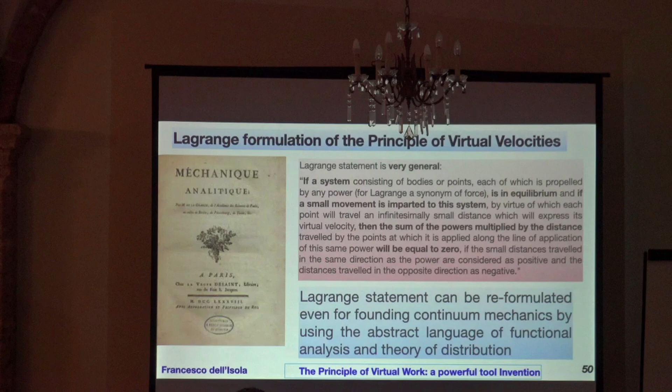I want to specify a little bit better the homogenization as conceived by Gabriel Piola, because here the audience is made also by experts in mechanics, and I want to underline that there are some differences due to ignorance. The process of obtaining macro theories in a rigorous way, starting from micro theories, is complicated. And so in order to proceed, we use this heuristic procedure. We have a beautiful way of telling in Latin, excusatio non petita, accusatio manifesta. I was excusing myself at the beginning, so I was accusing myself.

When I said that we do not know really, we can simply conjecture which are the continuum macro models which are good for a certain micro system. And to tell you that we are not so stupid, I showed you Archimedes' text where he is inviting us to conjecture somehow the result and then to propose to mathematicians the proof. Of course, Archimedes was capable of doing all the job by himself, and this is rather rare in history of science. Okay, so how do we formulate the conjectures?

And again, answering to Vladimir, the novelty you have for external interactions. Look at the first addend. There is no pointer. Look at the first addend. You have FV, force per unit volume, here. What is a force? It is the dual in the power functional of the velocity. Then you have integral on the boundary of B of F dot V. So this is a force.

It is a force per unit, no. You have to switch on, on the side.

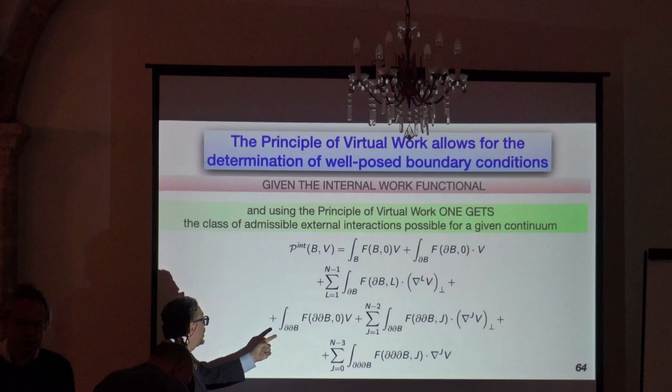Okay, so you have a force per unit surface. Then, which is rather new, you get forces per unit line and forces concentrated on wedges. So this is what we are familiar with. But you have also the dual in work functional of the transverse derivatives of the virtual velocity on the surface, on the edges, and on the wedges. Do they have to be compatible somehow?

What does compatible mean? All of these F's can be represented in terms of T lambdas in a generalized Cauchy theorem. So these F's must be balanced by an expression coming from the internal power given by T lambdas. Of course, if you consider rigid motion V, you get for the translation balance of forces, and for the rotation balance of moment of forces. But with deformative V's, you get other necessary conditions to equilibrium which are lost if you postulate only balance of force and balance of moment of forces.

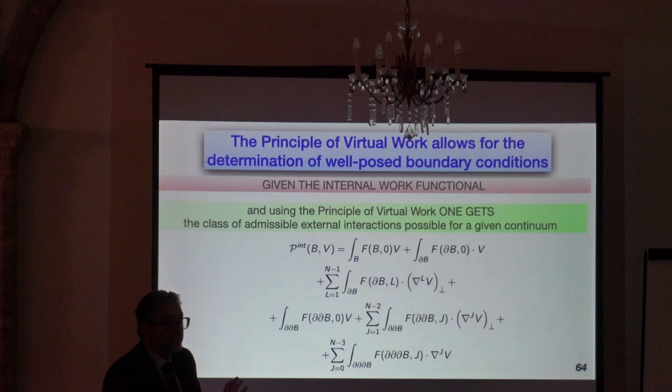And again, this is clearly written by Piola in his book. What is astonishing is that Truesdell calls theorem of Piola the theorem which proves that in equilibrium you have a necessary condition of balance of forces and moment of forces, but he has not understood that it is only necessary. It is not sufficient for equilibrium. So clearly he was reading what he wanted to read, not what was written. So we can easily deduce the class of natural and essential boundary conditions leading to well-posed problems, which for mathematicians is essential. Boundary conditions cannot be induced experimentally.

Now, let's go to a slide which I added for answering a question. The problem of synthesis is not new. The mathematical methods to be used must be similar to those already used for designing analog circuits. I am old enough, maybe few people here have my age or are older. We had to study the circuits which were analog to specific partial differential equations.

Why? Because in absence of digital computers, in order to calculate solutions of partial differential equations, you needed to build an electric circuit governed by the same equations, and then the solution was obtained reading the voltage somewhere in your circuit. So in the theory of analog circuits, you have the equations, and you must find the physical system governed by these equations.

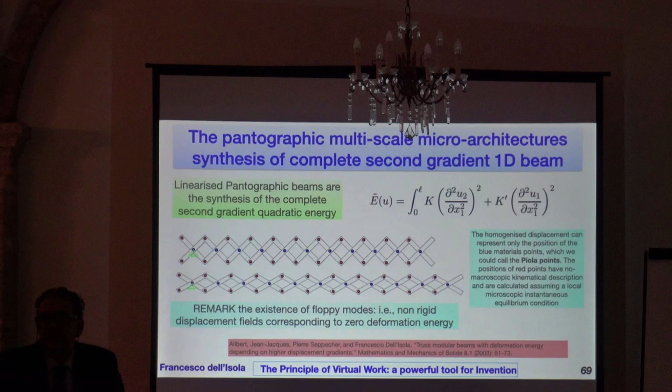Truesdell decided that second gradient continua cannot exist because the second derivative is negligible in a Taylor expansion. So, in his opinion, the second gradient is always negligible with respect to the first gradient. Okay, this is a good argument, of course, but look, this microstructure has zero energy for elongations. Nothing is negligible compared with zero. So one should teach Truesdell that a Taylor expansion has a dominant first term if the first term is non-vanishing. If the first derivative is zero, the first term is vanishing. And this was the crucial point in the argument we have used in this paper.

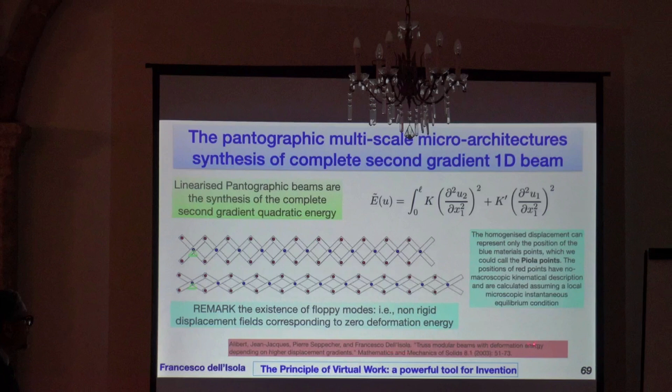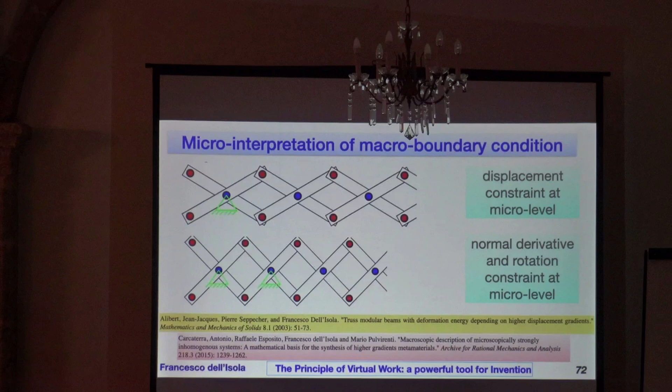Okay, now I must run. Of course, micro-interpretation can give you an idea of how you can realize the boundary conditions which you have calculated at macro level. For instance, this pantographic beam, if you want to block elongation, needs a double pivot there, and the double pivot is exerting a vincular reaction given by these micro forces. Now remark that this pair of forces exerts non-vanishing power on a virtual displacement which is changing the length of the cell, okay?

In the limit, this animal is expending power on the normal derivative, so on the derivative along this axis of the beam. So you have what is called a reactive double force. That is not a couple. It expends work on elongations.

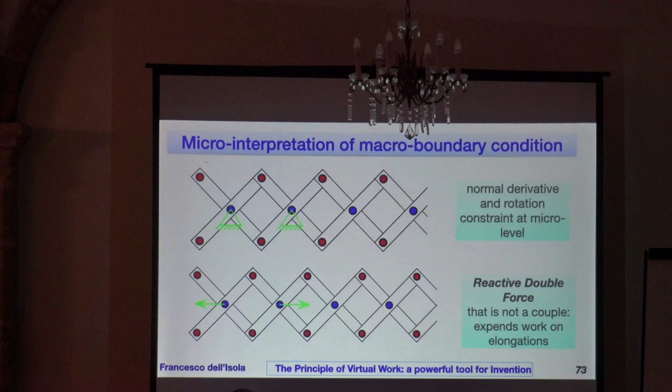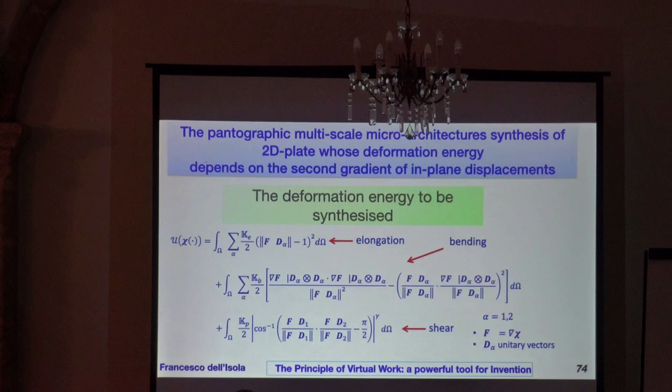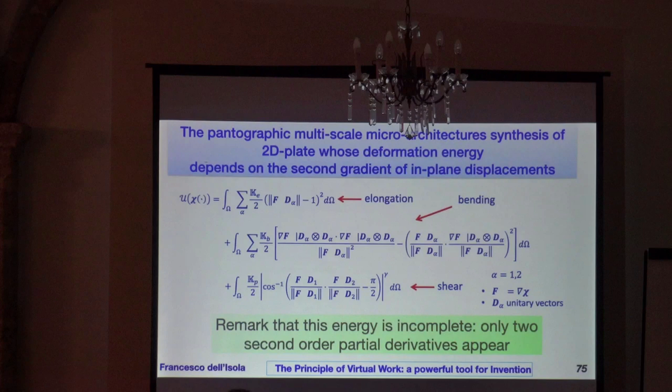Okay, then we wanted to have a 2D plate whose deformation energy depends on the second gradient of in-plane displacement. The deformation energy which we conjectured was that, and this is an incomplete second gradient energy. Some second order derivatives are not appearing in the energy. But, you know, one is moving one step after the other, okay? And the synthesis which we obtained is this structure.

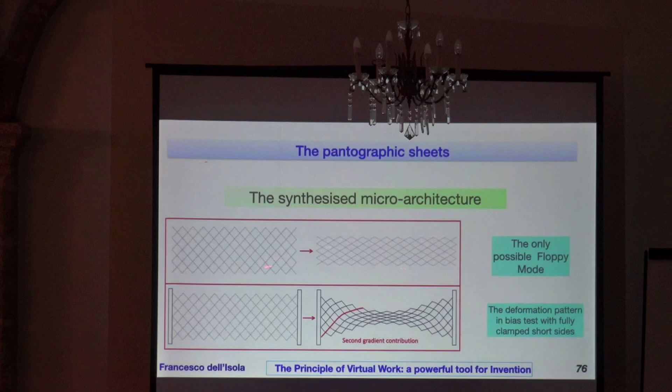Here you have beams, and in every node you have a perfect pivot, and you can understand why you get a second gradient contribution. This beam is bent, and therefore the second derivative of displacement of this beam gives you a contribution to the energy. There is a floppy mode without boundary constraints, which is this one. This is a mode of zero energy. Okay?

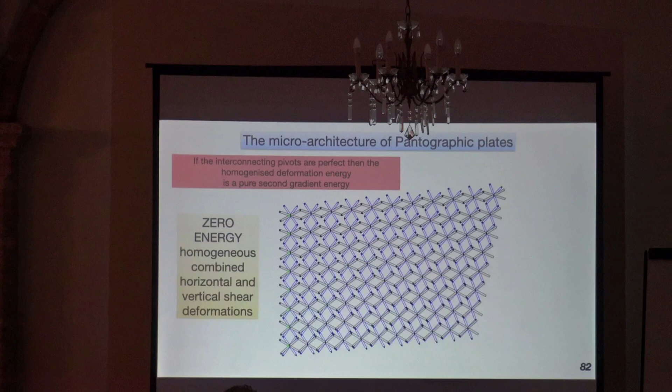Okay, then we wanted a more complicated energy with more second order derivatives, and we assembled horizontal pantographs with vertical pantographs, and all these are zero energy deformations, and therefore what we get is a pure second gradient energy without first terms in the Taylor expansion, as I told you. This is the microstructure made of springs. We also made a study of dynamic problems for that.

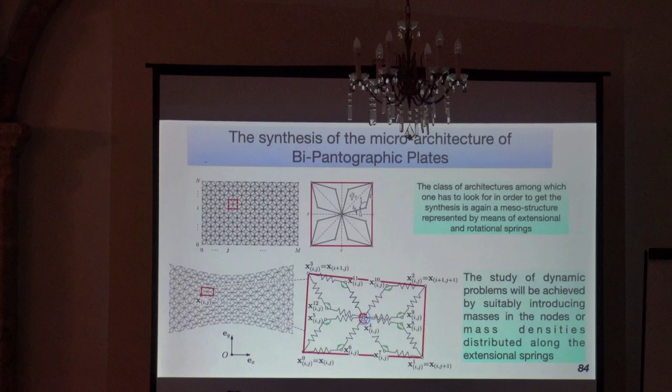And we found another mathematical problem. As the energies are incomplete, available theorems of existence and uniqueness are not applicable. Thank God, Nikolsky, a Russian mathematician of the 50s, wrote many books about anisotropic Sobolev spaces, which are spaces in which the norm has only some derivatives of higher order, and therefore applying his theorems,

of course boundary conditions must block floppy modes to get well-posedness results. So not only rigid motions, but also every floppy mode must be blocked by boundary conditions. We got a theorem which we published with Victor Eremeyev, Claude Boutin, and David Steigmann in the Journal of Elasticity.

Okay, now I will show you that everything is not a dream. We could print with 3D printers these microstructures. An important warning is needed. This has to be understood.

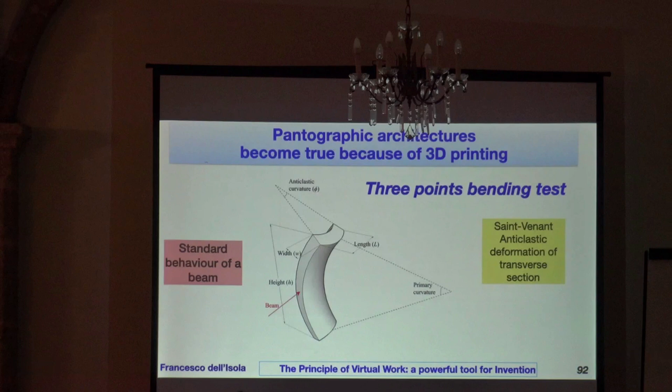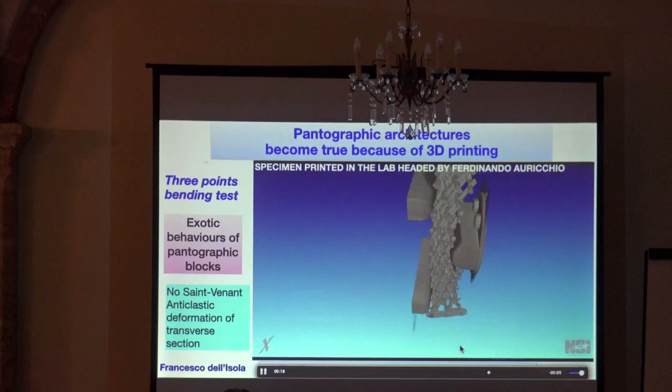Now, thanks God, I have a friend who printed this specimen, and another friend, François Hild at École Normale Supérieure Paris-Saclay. By the way, I must acknowledge my affiliation at l'École Normale Supérieure de Paris-Saclay for 3 years, starting from this one. This is not a numerical simulation, this is an experiment. In Paris, they have a tomograph. You place your specimen inside, and you can see inside it everything, producing these pictures.

And this pantographic structure has non-anticlastic deformation of the transverse section. So this is an extremely exotic behavior.

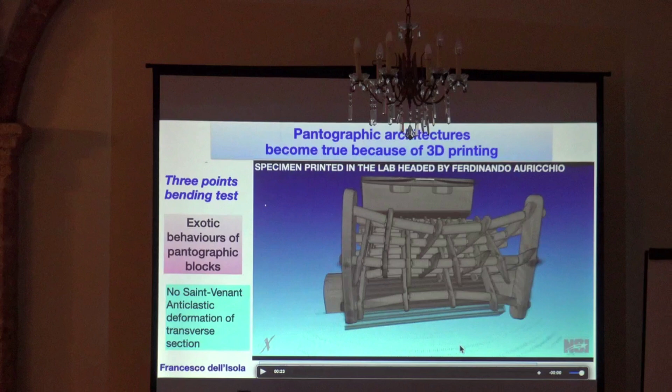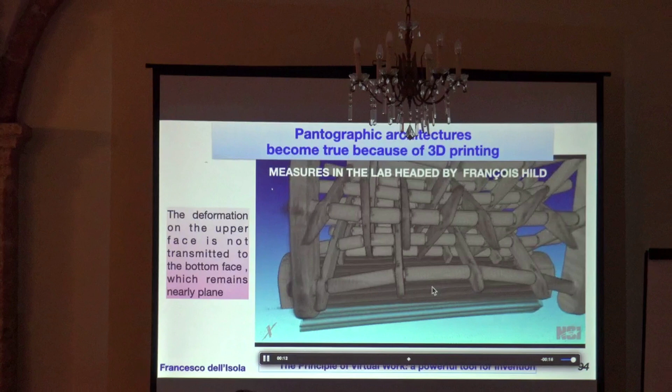And now what is important: the deformation on the upper face is not transmitted to the bottom face, which remains nearly plane. Look, we are exploring the inside of this. By the way, the dark colors are density of the 3D printed object, so it is darker where it is denser.

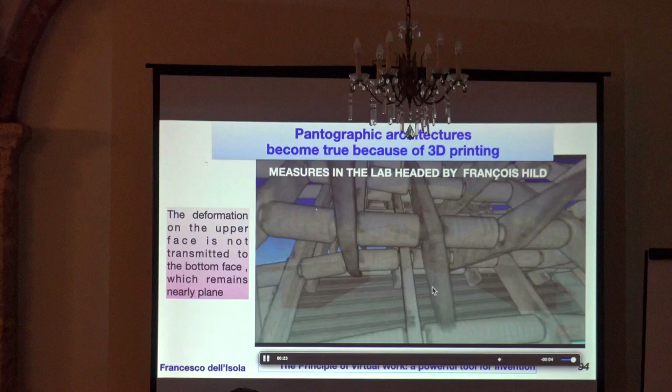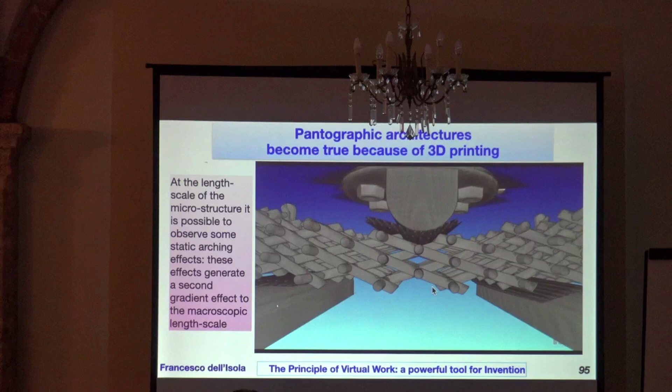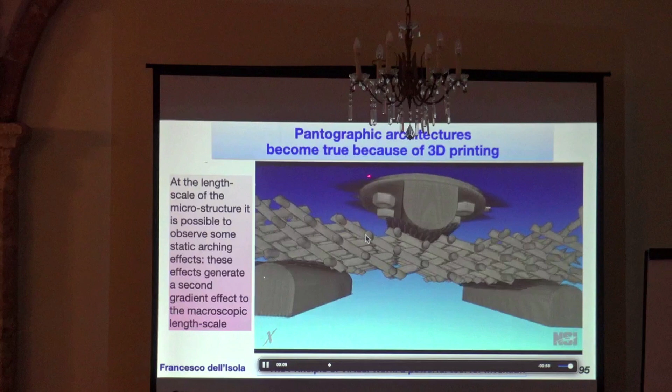Now, this could be a wonderful shield. You have a deformation of the top and no deformation at the bottom. And the arch effect is producing this nice mechanical phenomenon. These are arches, okay?

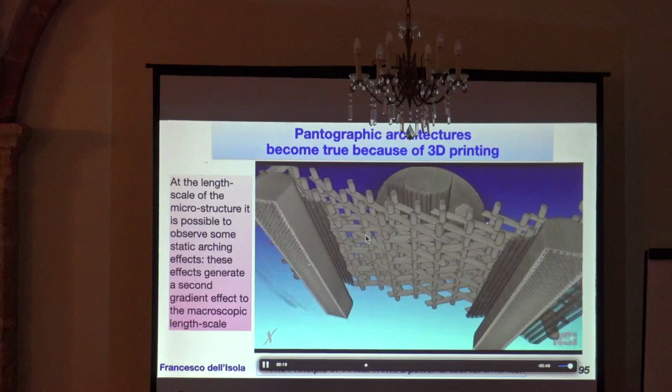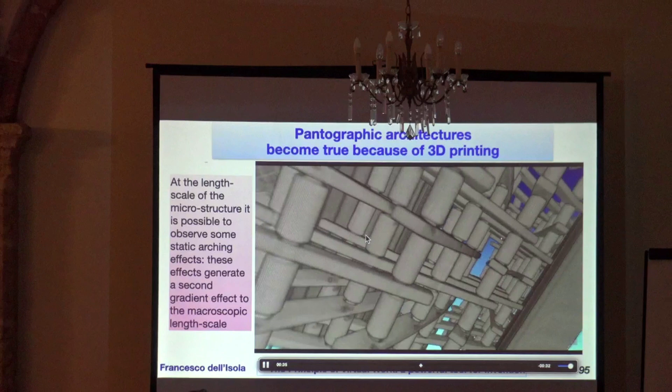And now we are exploring it. I don't know why I cannot control the speed of this software, but at the end of this, you will see that we are cutting the specimen. You know, Cauchy imagined cutting a deformable body in two parts - these are the Cauchy cuts - to study the action of the removed part on the remained part. Now this we can do in experiments, so you can measure everywhere the deformation.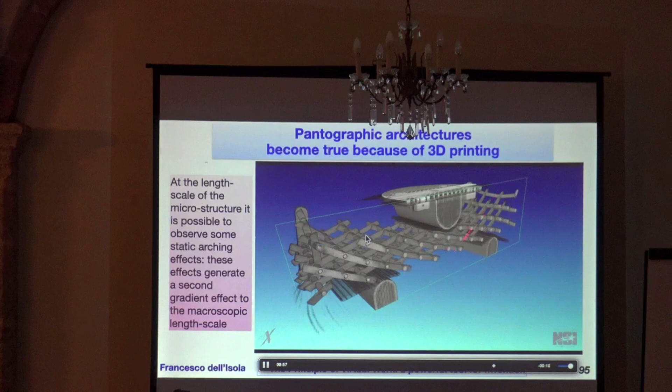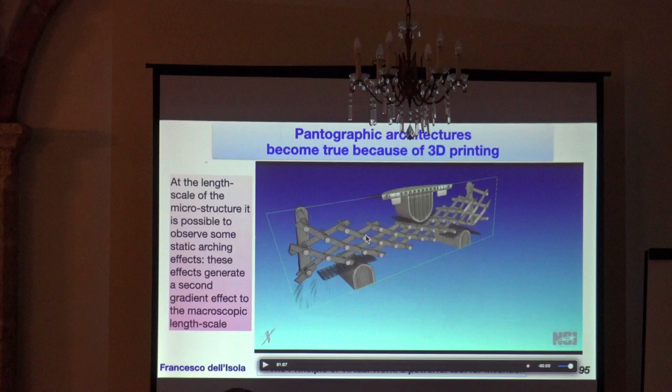By the way, nobody is measuring forces, you measure only deformations. This is clear. Force measurements are obtained using a theory - you need something like Hooke's Law or a generalized one.

Okay, we made measurements in Berlin of shear deformation of pantographic beams, and beautiful, look at this. A pantographic beam is experiencing a change of phase driven by deformation. It behaves as a Euler beam in the first part of the deformation process and as a cable in the second part of the process.

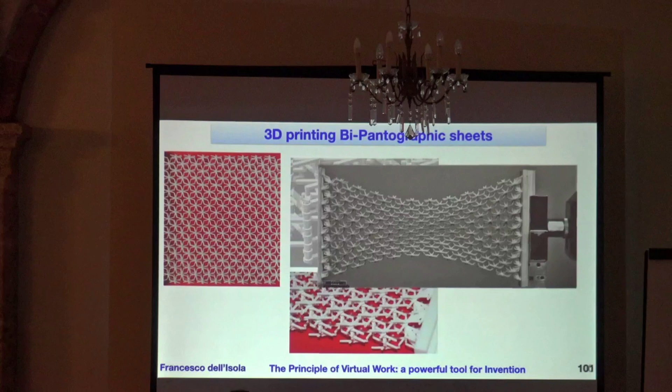And then we printed bipantographic sheets. These are all the details, this is a deformation of this bipantographic beam. And we also built the boundary conditions when we printed it - we imposed that the normal derivative is zero, okay?

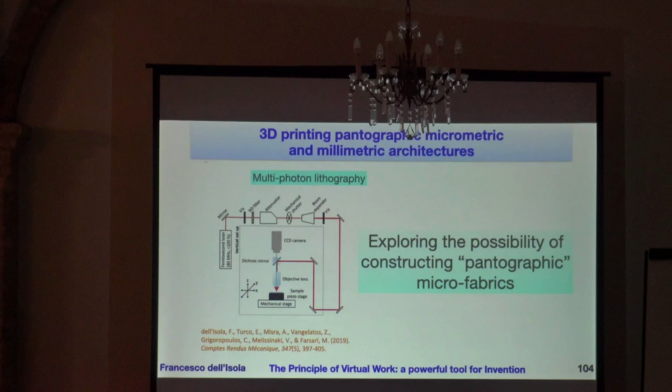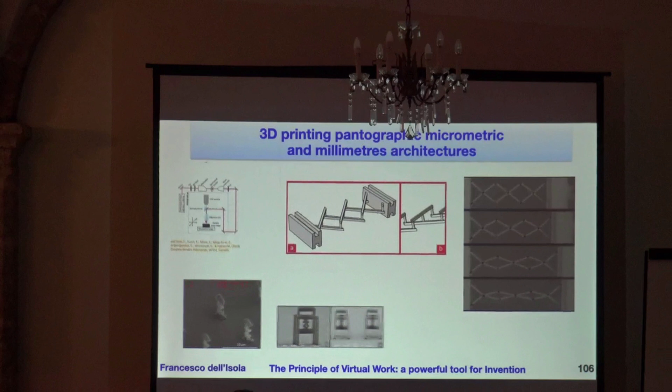And we also, using multi-photon lithography, constructed pantographic microfabrics. This is 20 micrometers, okay? And we built a device for elongating this with a micro device. And we printed a millimetric microarchitecture, and we studied this module for getting information on the behavior of the big structure.

In this paper by Anil Misra, the leader of this group, we found that the dimension of this small pivot here is critical for the macro behavior of the structure. So we proved that you can get 5 times the force exerted by the same microarchitecture if you simply change this pivot. Changing 1% of the volume of the specimen, you can have 5 times more force, which is another really exotic behavior.

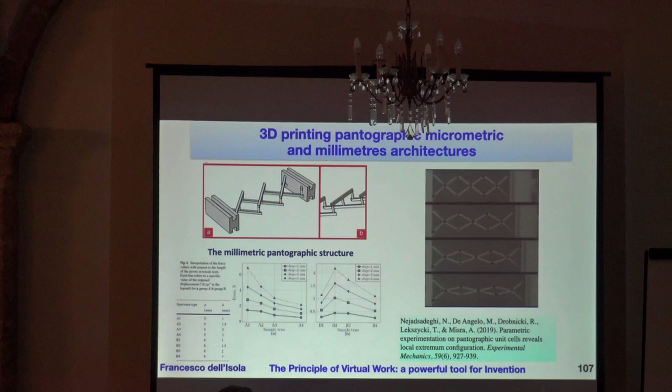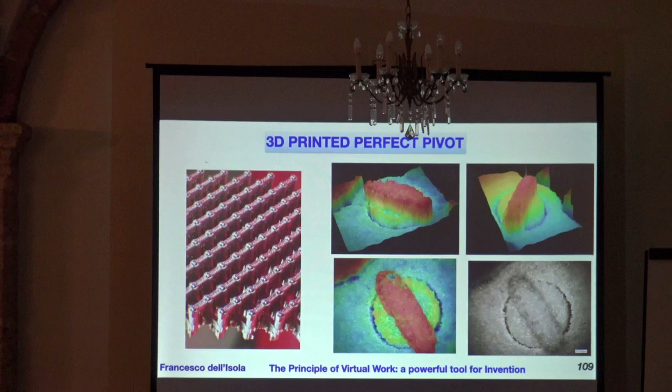Okay, then I printed it with metal. This is a multifocal picture which I shot myself, and this is the perfect pivot realization using 3D printing in one shot. So you can have perfect pivots printed like that.

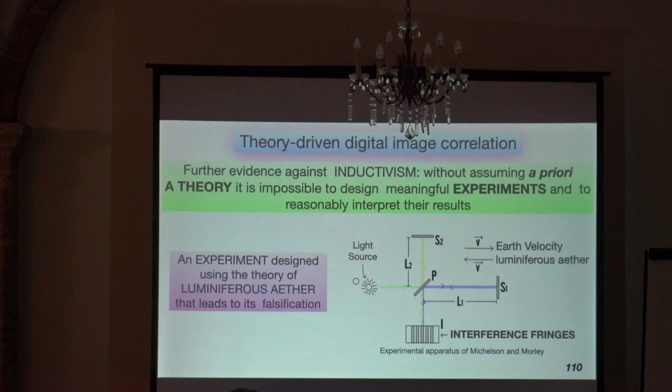And again, we have an evidence against inductivism. Okay? What we did with...

François Hild. Let me say a word for the French education system. I hope they will not change it. You have things like Grande École, and even if maybe they are decadent and complaining, they are producing outstanding people. In Italy, we soon lose contact with French science because we don't have something like that.

François Hild is an experimentalist. He is wearing the white jacket of the man entering the lab. However, he knows very well epistemology and variational principles.

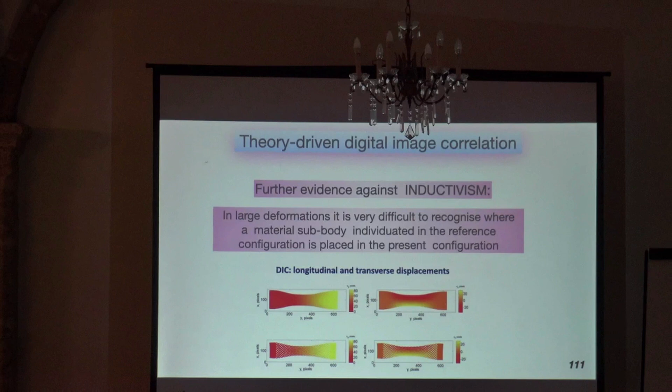Now, what I asked him to measure with digital image correlation was this deformation. He did not manage with standard algorithms. Why? Because in large deformation, it is very difficult to recognize where a material subbody individuated in the reference configuration is placed in the present configuration. This is a technical problem, very serious.

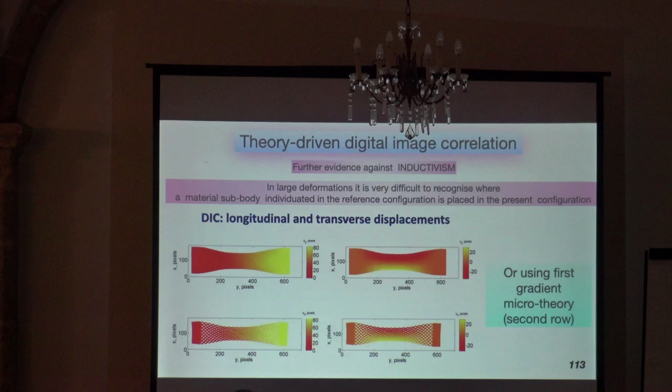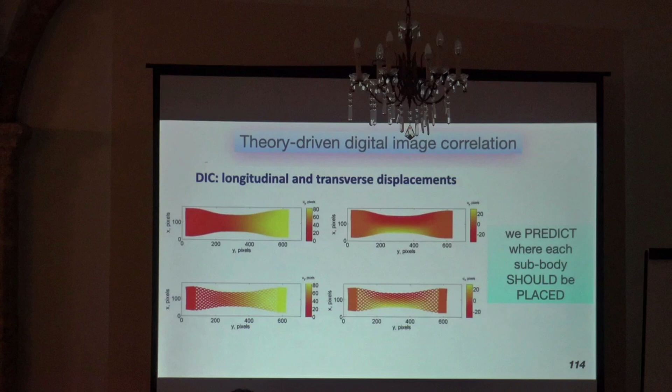What François did was use second gradient macro theories in the first row, or first gradient micro theory in the second row, and predicted where each subbody should be placed. So he knows that the theory is driving the experiment. Then he developed a code which looks for this subbody in the image obtained experimentally, also taking into account the predicted change of shape.

The theory suggests where to find what we are looking for. So once more, the theory is necessary to make measurements. This measurement is impossible without being driven by the theory.

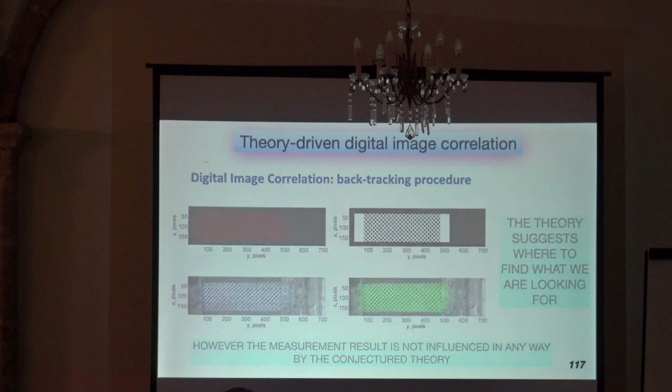So different finite elements and meshes are used in order to drive the digital image correlation with different models. You have a code. The code calculates theoretically the shape. This code looks around this configuration in the image to verify that your theory is not falsified.

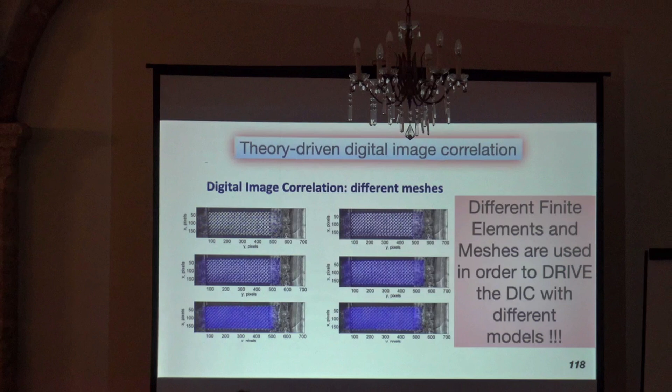I conclude by showing you that I deposited, too many years ago, in 1998, a patent in the United States for the first multi-physics metamaterial, which we called a piezoelectromechanical plate. It has a piezoelectromechanical microarchitecture. You have a plate, piezoelectric transducers, and an electric circuit. So a structural element is connected via a distributed array of piezoelectric transducers to a suitably optimized electric circuit.

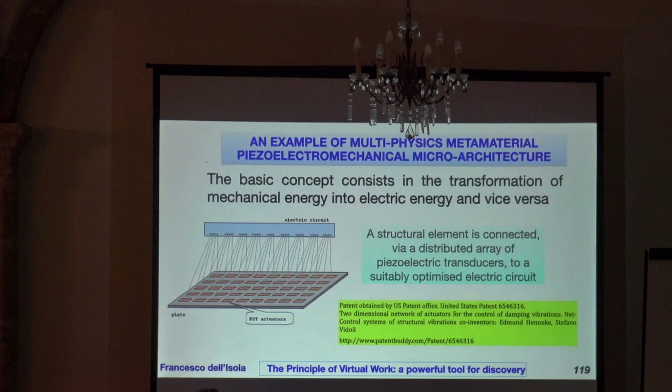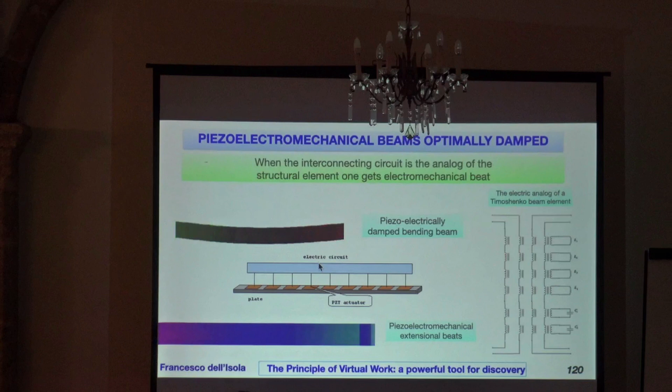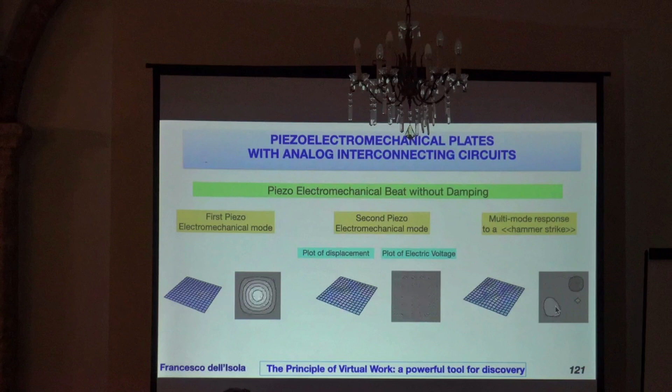Being in a hurry is not good. This is the coupling after a hammer strike. But what is interesting is that with the same unique dissipative circuit, you can damp the first mode, second mode, every mode up to the 9th. Why not the 10th? Because the wavelength of the modal shape at the 10th mode is smaller than the piezoelectric actuator, so you cannot reach it.

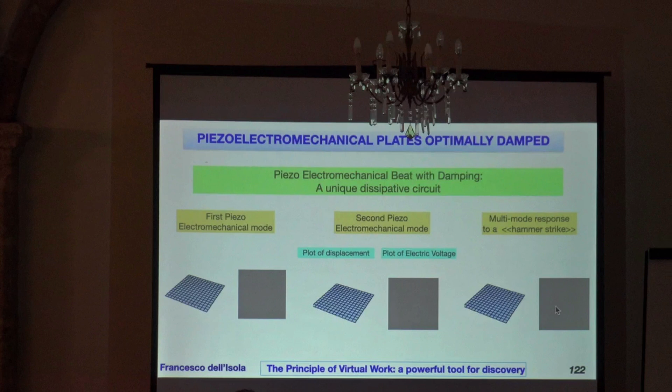So, conclusions. There is no unique model describing everything — forget it. Different scales, different models. If you are at the length scale of 5 millimeters, you need a second gradient continuum for modeling this system. If your length scale is 1 millimeter, you need Euler beam theory. If you are at 100 micrometers, a Cauchy first gradient isotropic model is suitable. If you are at 10 micrometers, you need an isotropic Cauchy model. If you go lower, you need quantum mechanics, probably.

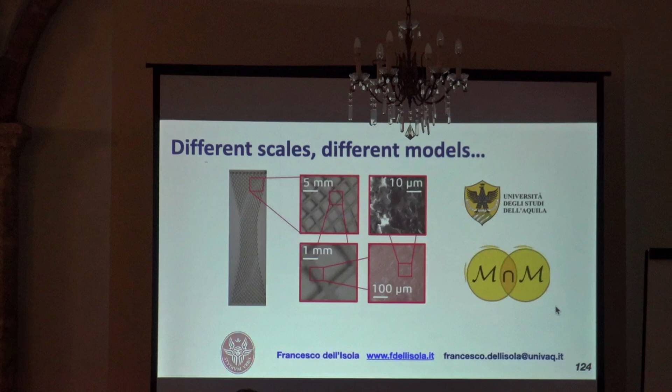And variational principles allow science to unveil nature.